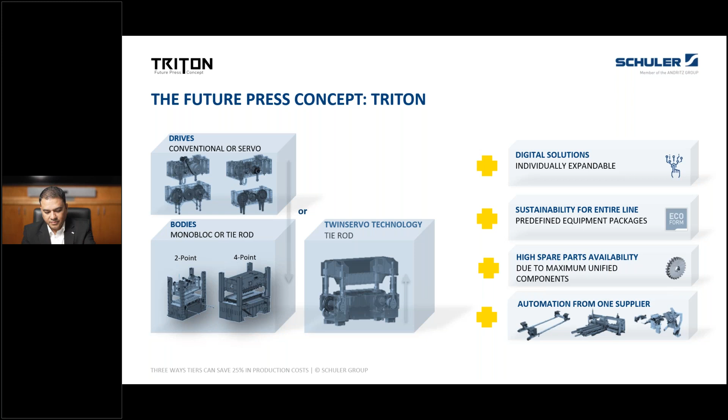So when I was talking about the modular design, we all know that modularity is a principle. When I talk about a principle, the immediate example that comes is a car. If I want to buy a car and I have got less money in my pocket, I can still go and buy the basic model and then upgrade it later on with whatever modular things are available, for example, a 7-inch screen display on my car.

So with TRITON, you get increased output because most of them are built to that extent, like servo presses, and more availability with putting on different automations as well as digitalization. We also have faster setup with offline simulation programs, enhanced flexibility for the dies and the process. Of course, you can do certain things offline and then bring it when the press is ready for production.

Reduce training time for new workers. Most of our softwares or the programs which come with the TRITON presses are intuitive. It gives you enhanced things and they are graphic driven, plus the videos. It helps the customers, workers, pretty fast to come onto a level which is required by the company.

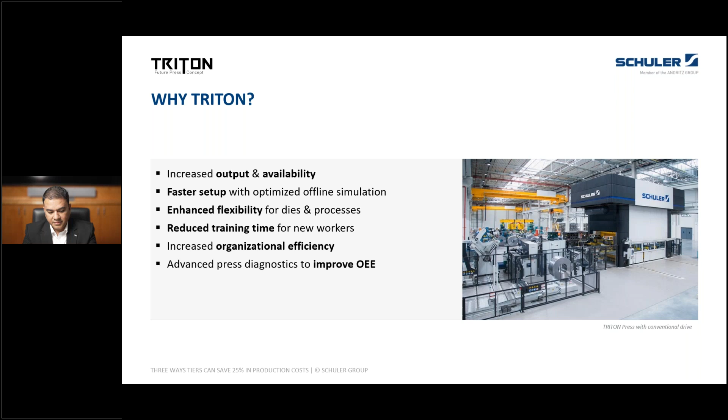So, 3 ways a company can save up to 25% in production costs. We have curated 3 main topics for you all: technology, digitalization, and operations. When I talk about putting it at 100%, let's take a theoretical example. So technology contributes close to around 70% of the entire cost. Digitalization, close to around 20%, and operations being at around 10%.

Now, most of the companies have a good amount of skilled labor, so they can do away with simulation softwares if they're already doing it. So you can do away with those 10%.

But when I'm talking about technology, it has subdivisions to it, like rigidity of the press, performance of the press, how much energy saving I'm doing on each part, each component, family of parts, higher efficient motors that I'm using, efficiency of these motors, how much I am minimizing the higher off-center loads, transfer with anti-vibrational damping, which is Schuler technology again, which we will see in one of the videos as well.

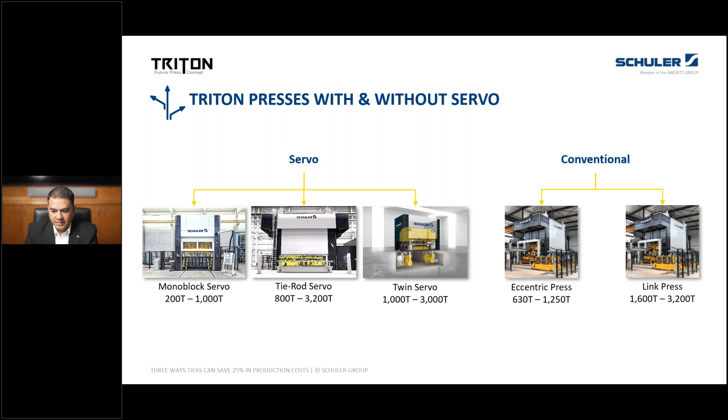Servo presses are quite efficient, directly attached to the main shaft or drive shaft without reduction gears. You get high optimum torque even at slow speeds. You have water cooling, which earlier was air cooling, or in flywheel presses it was much more difficult. You only had sinusoidal waves, so from TDC to BDC it would be constant. But with servo presses, you can control how your slide behaves from TDC to BDC.

I joke around with a couple of people when I meet my customers. In humans, you've got two main dates, the birth date and the death date, and everybody around you is interested in what happens between these two dates. So my joke for the presses is everybody is interested in what is happening between the TDC and the BDC. We all are interested in this zone only.

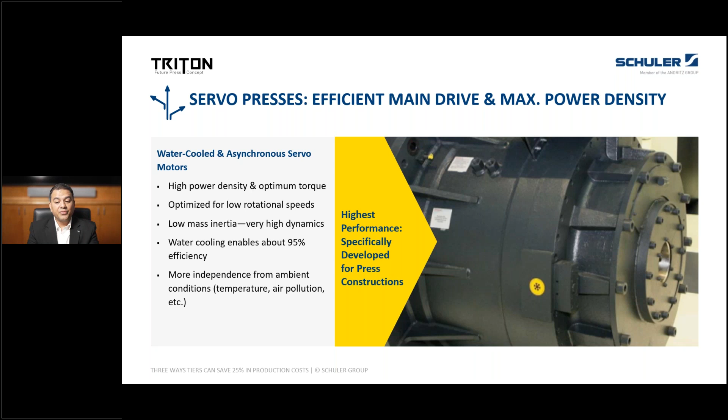So that's why with servo presses we are much more interested, because we get more time for our transfer, for our lubrication if we are performing anything, part transfer if there is a rollover in between. And we can take much more into consideration if we are doing it with a servo press.

Here is an example of the same. On the left-hand side, you've got a TML, which is a link-driven 4-point 1100 ton press with a table size of 5 by 2.2 meters. When I talk about tonnage, I'm referring to metrics, not US tons. The total consumption for this press was around 11.04 kilowatt hours. Let's consider this as 100% of the energy utilized. On the right-hand side, the center graph shows total consumption using the same 4-point servo-driven press was 8.18, which is close to around 26% less energy.

The component was similar for both these presses, and we were running at around 14 parts per minute for the continuous run. We measured it with a 4-quadrant counter EVU measuring device, and the measuring time was close to around 15 minutes. So you can see that when utilizing a servo press, the energy savings are approximately 26% for consumption.

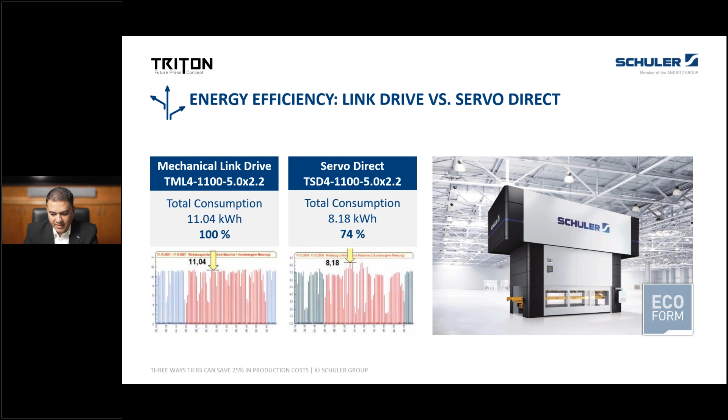Energy efficiency. Sustainability is much more important today than it was earlier. So Schuler is bearing down on all relevant parameters in plant process technology, whether it's a matter of saving electrical energy, cooling water, air, space requirement, machine configuration, process optimization, and many more.

TRITON presses use energy efficient components, like I mentioned earlier. Most of these shown on the slide are standard, except the noise absorbing cabin or sound enclosure. Most common on the European side for less energy consumption are illumination with LEDs, and main drive motors using a torque motor with servo drive that can be up to around 96% efficiency. Hydraulics, powertrain, of course, with optimized mass inertia, fewer moving mass with the gears, and less friction in the crown.

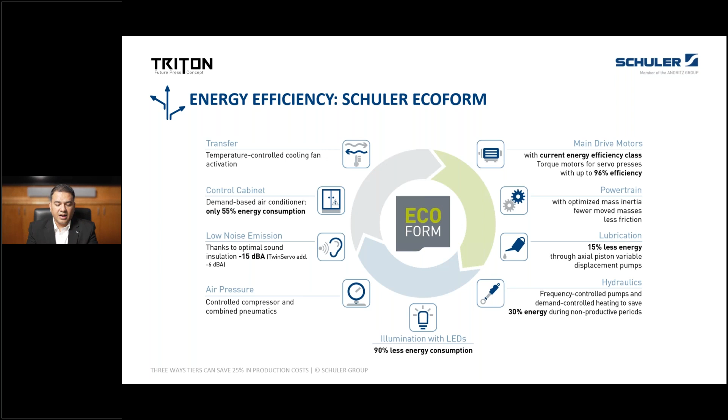One of the packages we talk about is energy monitoring. I have been emphasizing energy because this is what most companies in the Asian and European markets are much more concerned about. Either way, it is also coming to the US as well. With a package like EcoForm Plus from Schuler, you can monitor energy consumption per part, and total energy consumption of the complete line. This gives you the capability of immediately seeing how much energy consumption is done by your machine.

You can also quickly and easily identify deviations because you've got historical data on this. The energy monitoring system creates the highest level of energy transparency. So the production manager might come up with questions like: what stroke rate is most efficient? How much energy is consumed for one part, or what part is causing a problem for the energy? How much energy was consumed during each shift, and so on.

We also have options like the energy efficiency package for process monitoring. For the envelope curve, you can have two limit curves, the upper limit and the lower limit, and you can define how your target value looks. Whenever your tolerance band is crossed, the press shuts down when the set parameters are exceeded.

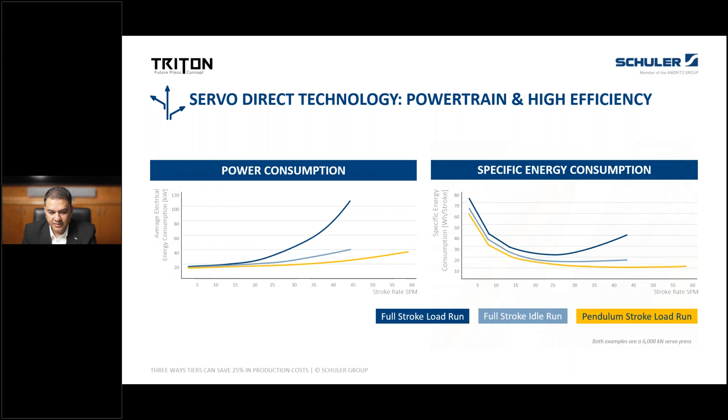Low mass inertia, high force compensation. Most or all of our presses use double helical gears, also called herringbone gears, which transmit power between parallel shafts.

Herringbone gears were developed to overcome the disadvantage of the high end thrust present with single helical gears. Since it has the opposite helix angle and the gear cuts accordingly, with a very narrow gap in between, it ensures axial thrust loads are negated.

These are self-centering gears, and that's the reason you don't have any external transverse forces. These are cast wheels and in one piece. That is where they give better dampening properties, higher stiffness of the drivetrain, and thus also lead to direct power transmission and long service life.

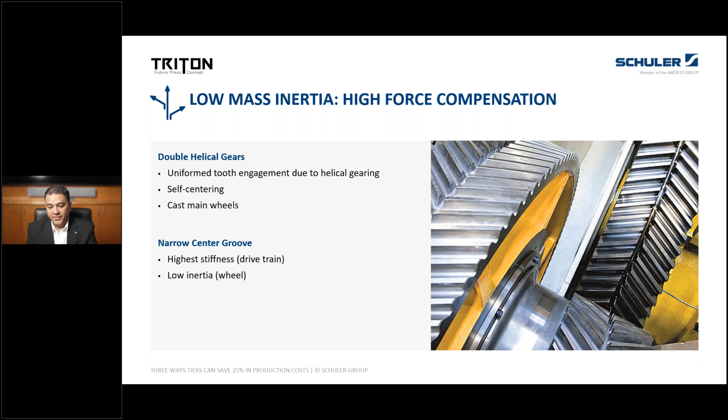Under the technology, one more point most customers are worried about is the high off-center load capacity. With Schuler presses, we have higher off-center load, and permissible forces below the curve are completely usable - meaning 100% of the press capacity.

The extremely high tilting resistance combined with the reduction in deflection leads to improved quality of the parts. It reduces stresses on the dies, so you don't have much die work or repair, and die life is a bit more than average dies used on conventional presses.

For example, the pressure points on the twin servo, as mentioned earlier, are on the outer side. So you get much more off-center load capacity, minimizing the off-center load issue on a TST press.

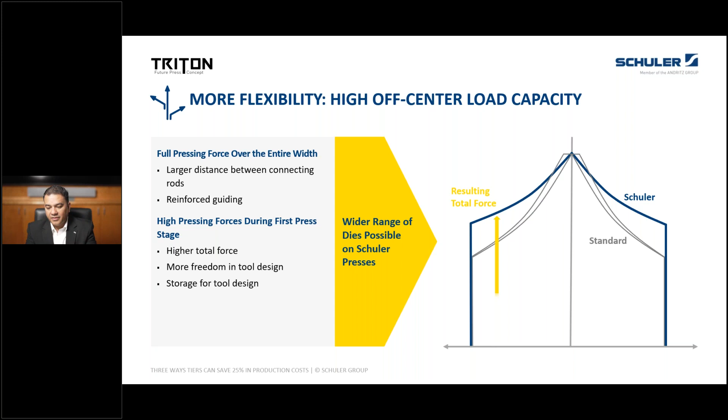Most presses generally have around 67% of the total area as the power on a specific area - like 2/3 of the length multiplied by the width. In Schuler presses, it is 2/3 of the length and 2/3 of the width, which is close to roughly 40 to 45% of the total area. This means you have more power possible on the same area when operating with a Schuler press.

Pressure points: Schuler manufactures presses with 2-point as well as 4-point pressure point configurations. Depending on the force transmitting element, we have different configurations for the pressure points. When an off-center load is exerted by the die on the slide...

We all know a multi-point press is better able to adapt or counter the resulting tilting movement, so you've got large adjustment ranges for maximum flexibility. Our presses have around 2 inches of overload, close to 50 millimeters of overload travel, to protect the press as well as the dies.

It detects loads higher than the nominal and shuts down the press movement. There is an oil chamber which releases during the process, giving time for the slide to brake.

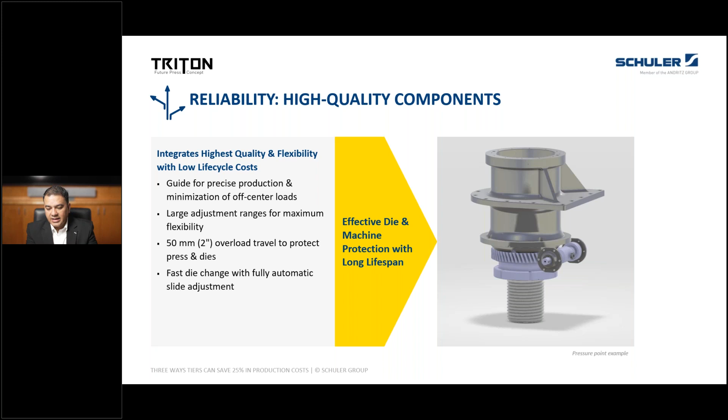Slide guiding: the better the slide guiding, the lesser tilting you have on the press. 2-point presses use 8-sided roller guides, which are backlash free and pre-tensioned. Roller guides are similar to ball guides, but roller guides have a line contact with the slide and greater load capacity compared to the equivalent size of a ball version, providing a greater area of contact.

On 4-point presses, we have guides suitable for large cross forces. The slide guiding is guided along the entire stroke of the guides.

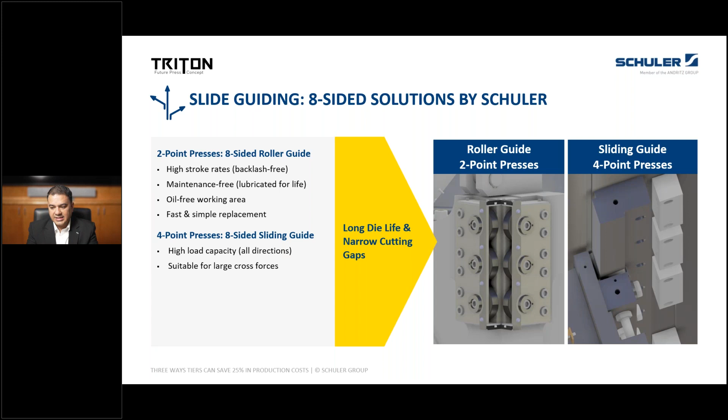Schuler transfer system with active vibration dampening, or AVD. This is also a modular system that Schuler has developed and has been used by so many customers worldwide. It's an asynchronous movement, profiles, selectable clamping boxes, which you can have positioned in the entry or the exit, with freely programmable axes with perfectly synchronized movements, providing the best adaptability for all the components.

4-point and 6-point support offer maximum rigidity of the rail and safe transport of the components, even if operating at maximum speeds. So if you're overlapping most of the automation with the transfer system, you can get a high output of close to around 10 to 15%, also at higher velocities and acceleration with less vibration.

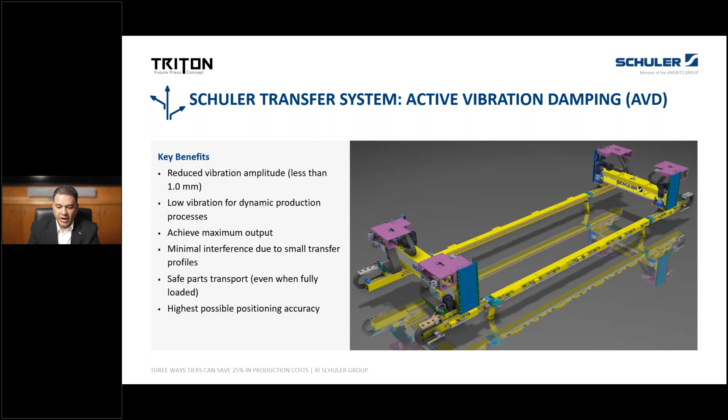I've got a beautiful video for you all over here, which explains exactly how this works. So this particular press, for example, is operating at around 34 parts per minute.

And you can see the vibration which is happening when we have the AVD off. As soon as you switch it on, within a couple of seconds, you can see the movement is completely gone and stabilized. So the x-axis is close to around 800 millimeters, the y is 200, and z, the lift, is close to around 50.

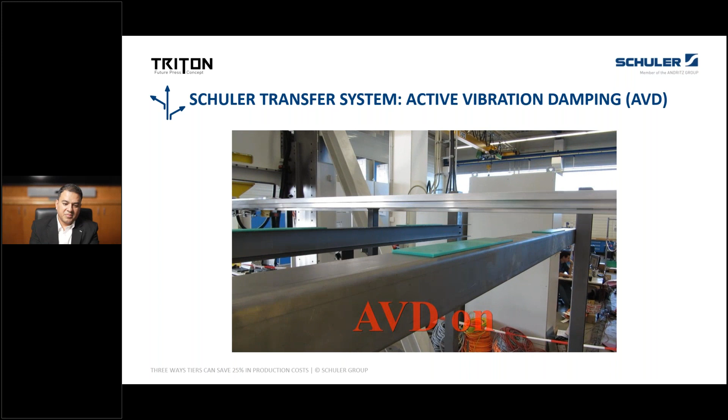Plus, the electronic overload protection of the transfer system guarantees a safe shutdown and that the axis does not have to be recalibrated again.

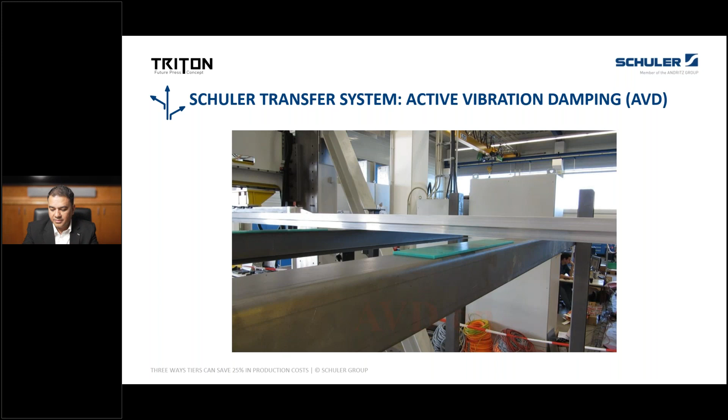Like I mentioned earlier, Schuler is always present as a turnkey solution provider, from feeding to removing. So with Schuler Complete Line, you have one contact or the main project manager. Output optimized, with the same visualization, the HMIs almost identical for all the presses throughout. So it is so intuitive that the workers as well as the on-site managers have very easy operability of the HMIs and visualization.

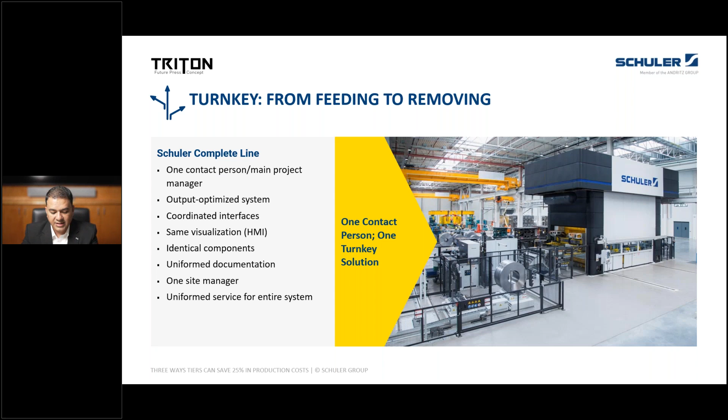Going on to the next topic is digitalization. So we're talking about overall equipment effectiveness. This is a production monitoring which we have on most of our presses. We all know that overall equipment effectiveness is like a standard for measuring manufacturing practices. Now, in theory, if we multiply all the factors together, an OEE of 100% means you're manufacturing only good parts as fast as possible, with no stop time.

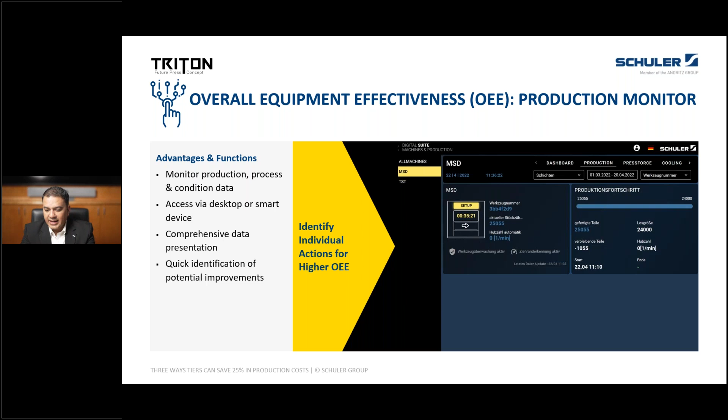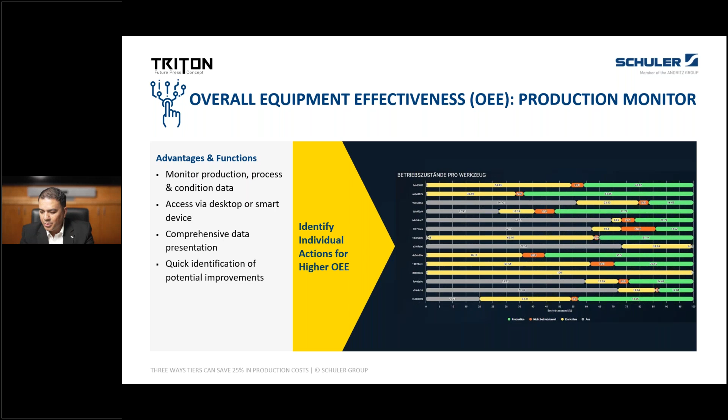Another screenshot talks about how much time the machine was under production for each and every die, how much time it was under non-performance, and how much time it was under setup mode as well.

Overall equipment effectiveness can also be done with one of our camera-based monitoring systems, which is VDP, a visual die protection. The beauty of this product is it can also be implemented or programmed onto a non-Schuler press, so it is not Schuler related. It's a separate digital item, a camera-based monitoring system, that can protect against tool damages, machine downtime, and can save costs up to around 10%.

With this camera-based system, you can detect foreign objects which are present. Of course, there is maintenance happening on the dies—sometimes the maintenance guys can leave spanners, or there is a missing part. There is process inspection, in-process checks, monitoring of critical die functions, and so on.

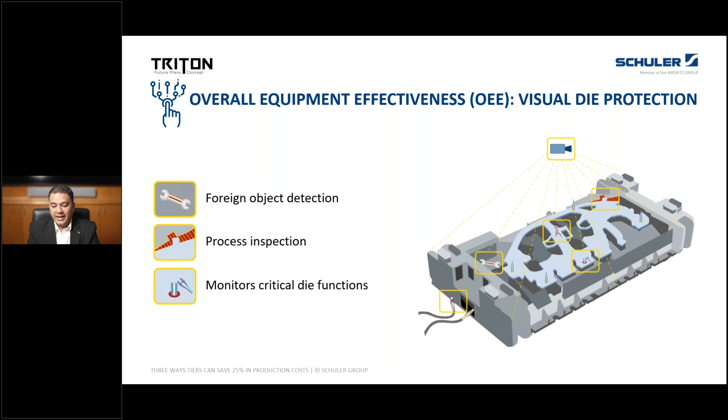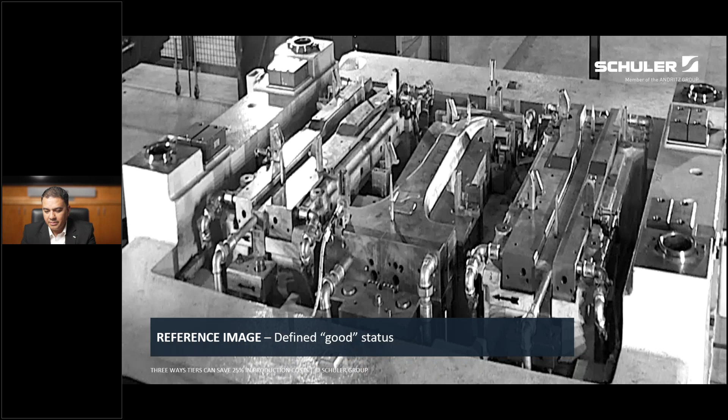So the first time when you put the VDP into use and you're about to go for production, you make a reference image. This is called the good status of the die. I will be going forward and backwards between these two slides multiple times because I want to show you how the anomalies work.

On the left-hand side top, the part was not taken out, either by the operator or a robot. You can see on the part on the left-hand side there is a glove left by the maintenance guy on the die, there is a spanner, and also a pin which fell loose on the right-hand side. This is the actual triggered status. Every time there is an anomaly, it sends signals to your press and the press shuts down or stops immediately.

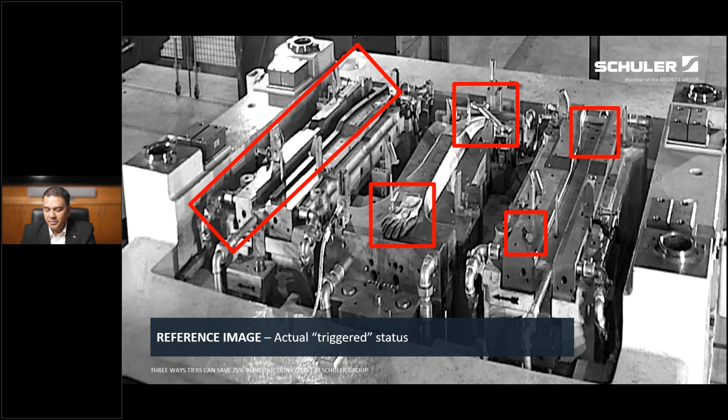I've got a video for this, which I'm going to play for you.

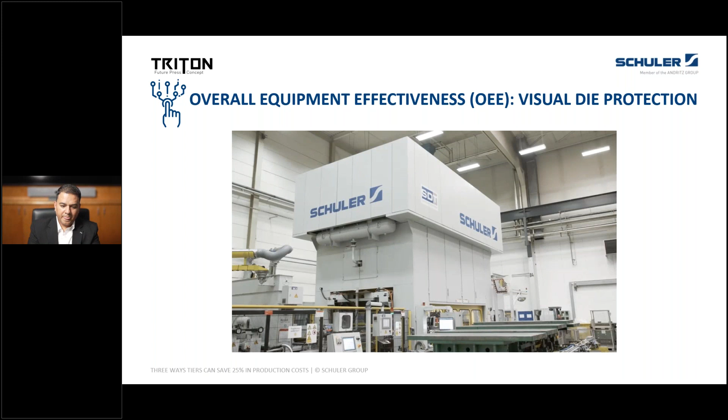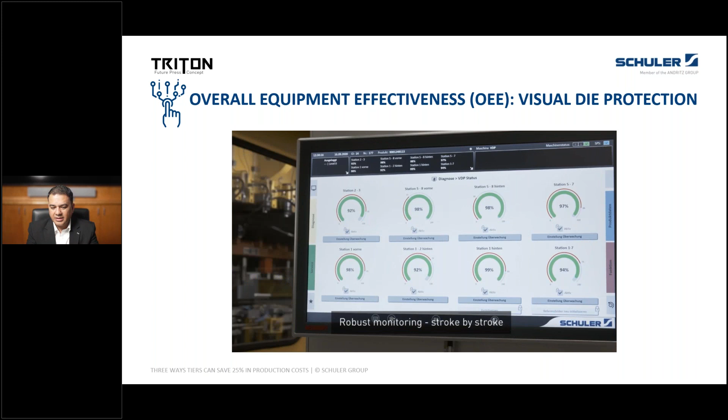With VDP, you can put up to 8 monitoring functions on one particular die. You can select the camera, the time, the image area, and specify the limit value for that particular critical deviation that you want. The cameras then start monitoring the press when it is in function.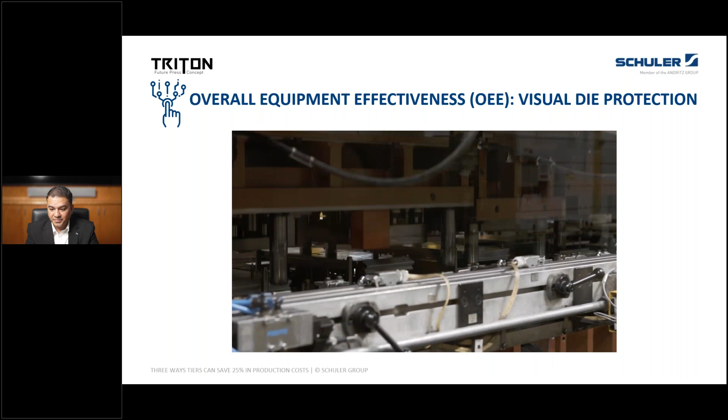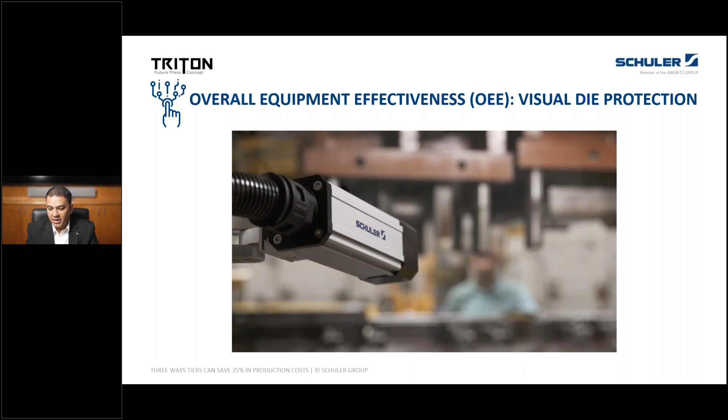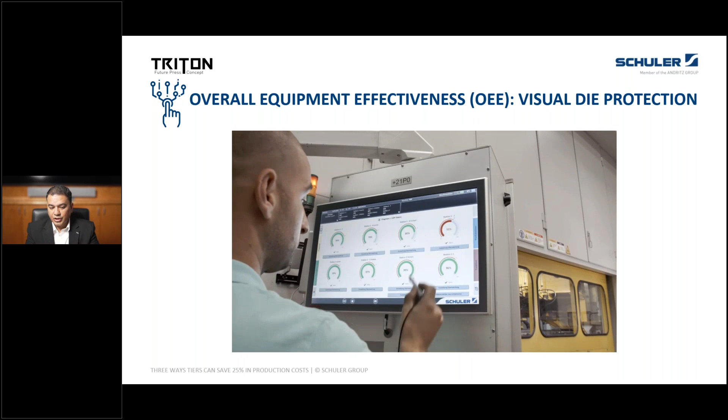Whenever an anomaly or something happens which you have reported, it will immediately tell you what exactly the anomaly was. You can go in, correct it, and restart the press again. Live images are compared to the reference images at defined times and checked for the critical deviations that you have.

So let's move on to the next topic, that is operations. Under operations, Schuler has got a couple of online as well as offline programming options, like the Optimizer Pro.

The Optimizer Pro is a basic curve generator. You can program everything offline and then push it onto the Smart Assist, which helps record die-specific parameters for the press, the transfer setup, plus you can do the optimization.

With the Optimizer Pro, the transfer angles can be calculated automatically. Movement profiles of the slide can be designed freely in regard to the stroke height, form, as well as speeds.

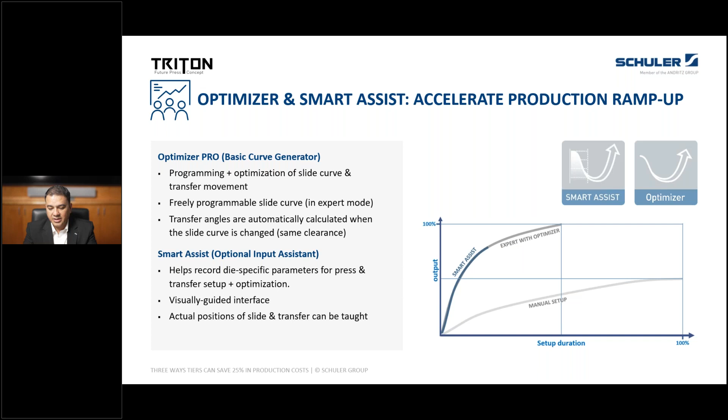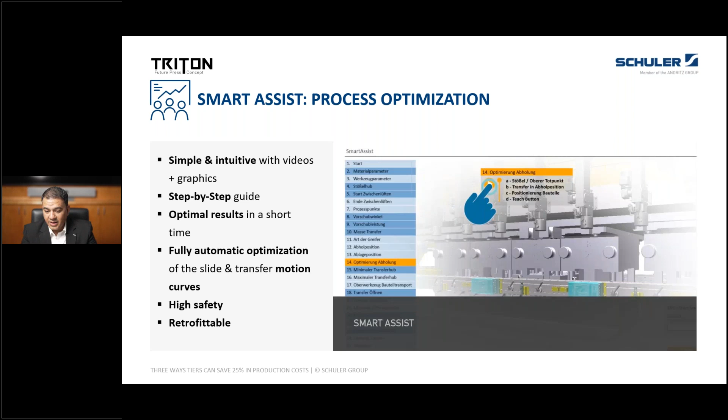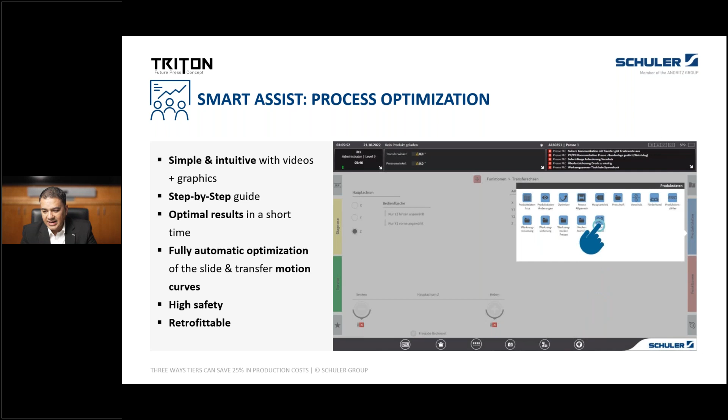Let me take you through one more video, which is simple and intuitive with the graphics. Like I said, for your new level workers as well, this is absolutely simple to go through. Under Smart Assist, you go to the production data, you select the Smart Assist, and you get a bunch of options.

So you start clicking the one which you want to optimize for your particular transfer, and it will give you step-by-step information as to exactly what you need to perform.

So you open the slide, ensure that the position of the slide is at TDC, position the transfer at the pickup position, lift the parts by jogging it in the Z axis until the target feed movement is achieved, and register that particular target and put it into the teach function.

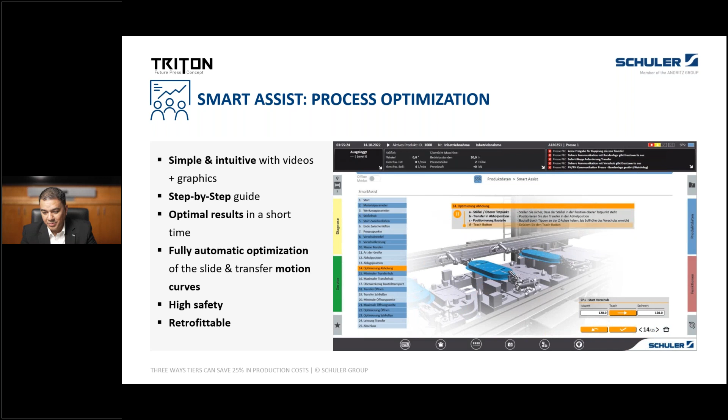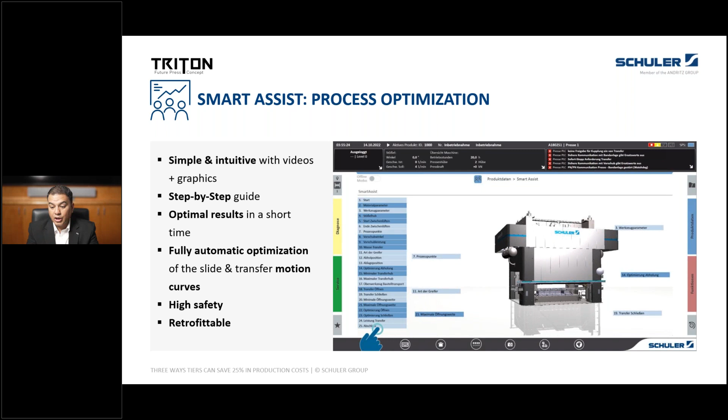And then once it is absolutely clear of the tolerances, it takes care of it. This is also beneficial for easy creation of new die programs when they come in, or new part programs that you're developing for the OEMs or tier 0.5.

Data is recorded directly, with the teach-in functions and the press control panel or a smart device. It is fully automatic because you're taking all the data from the Optimizer Pro.

This particular Smart Assist is also retrofittable. But it all depends, because if you're having presses which are too old, most of them probably do not have, for example, an Ethernet connection. So we can figure that out, but it needs a lot of diving into the situation you're currently in.

DigiSim Unlimited is an offline virtual production ramp-up software. This is an offline simulation. It can be for a progressive die as well as for the transfer presses.

This is an add-on to one of our other simulation programs, which we call Transfer Basic. It also has beautiful features like programming of additional movements if you have lifters, rotating grippers, kinematics, which are completely different from what you want to do from one tool to another. You can do automatic collision control as well.

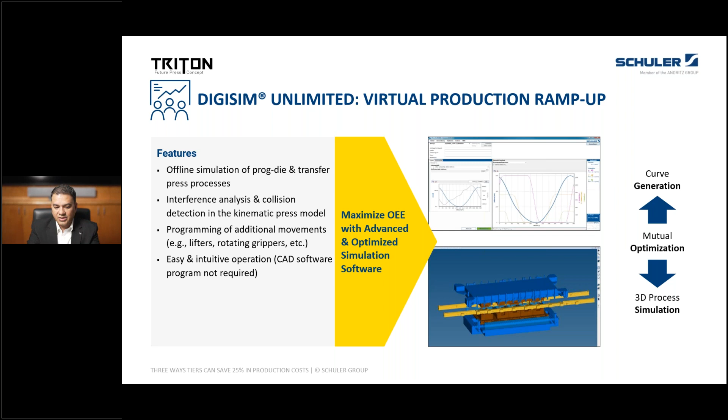DigiSim has got generation of all necessary processes. It has reliable output calculation for better pricing of the part. Die data can be prepared, optimized, and managed offline. So if you have a new die or a new part set which you have to prove out, you can do it offline to the absolute last level and then push it onto the press.

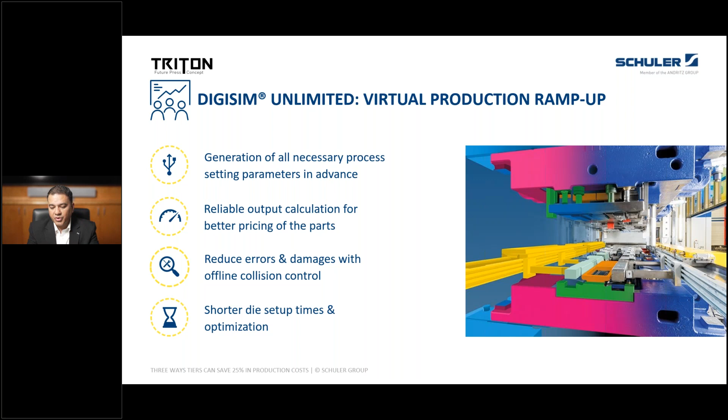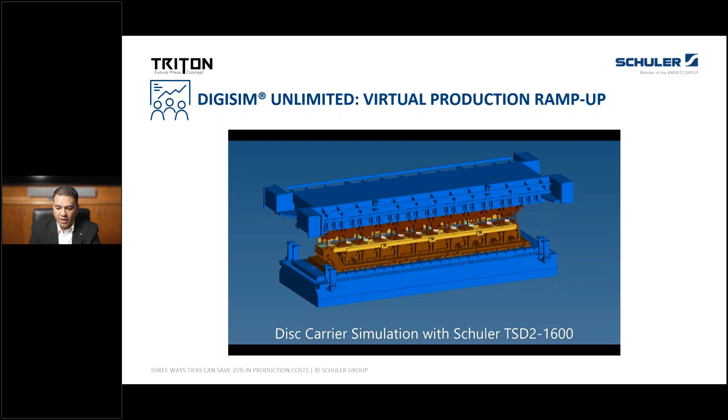To explain this, I've got a video. This is a simulation done on our servo press 1600 ton with a medium duty transfer system.

You can see you can operate the press at different stroke levels and see how exactly you can ramp up the production, at what speeds you're operating, whether it's 160 millimeters before BDC or after, and you can go up to 240 millimeters per second. The transfer movement is optimized with overlapping motion of different axes.

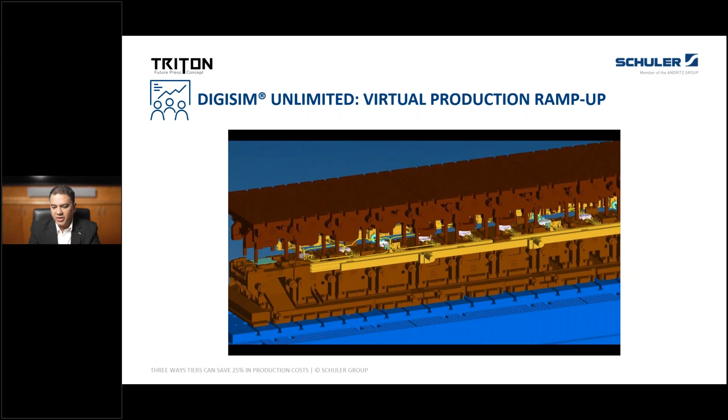And here you can see the same speed forming as a conventional press. If you're operating, that would do around 9 parts per minute.

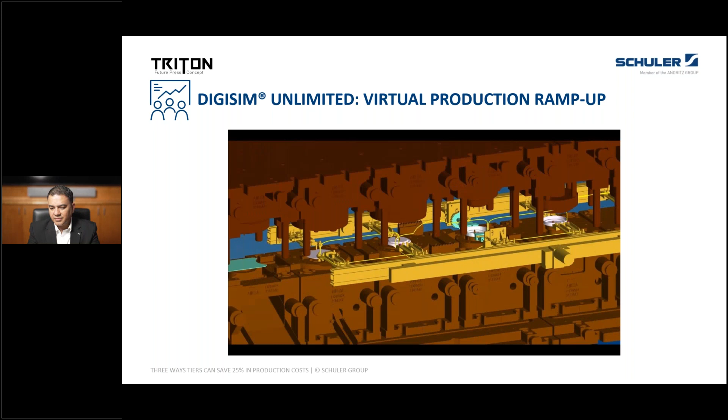In that, we come to the end of the presentation. I hope you all were okay with whatever was shared, and thank you for being patient listening to our presentation.

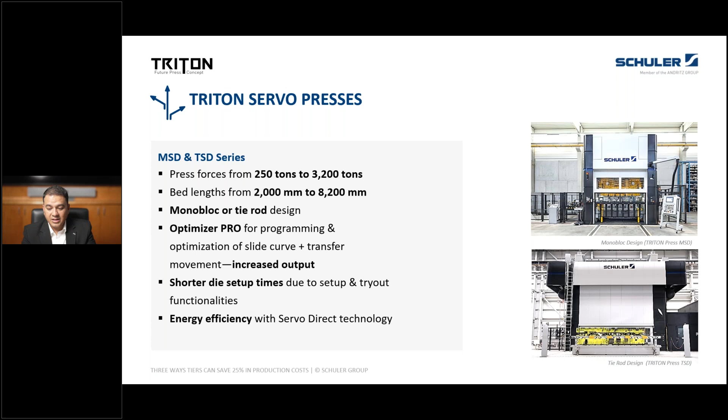And just to recap quickly, we have got, like I already mentioned, these are the series that you have, like the monoblock design and the tie rod design. We have press forces from 250 to 3,200 metric tons. Comes in a monoblock or a tie rod design, with Optimizer Pro, shorter die setup times.

TSD version, worldwide it's unique. Why? Because it's got the servo motors in the pit. That's how you get around 30% less spring back on most of the components that you're manufacturing. It has got significantly higher off-center loads with the same press force.

And of course, with the flywheel or the conventional driven presses, we've got eccentric as well as link drives. So eccentric drives up to say 1250 tons, and thereon we are into the 1600 ton up to 3200, we are into link driven presses. And if we have any questions, I can answer them.

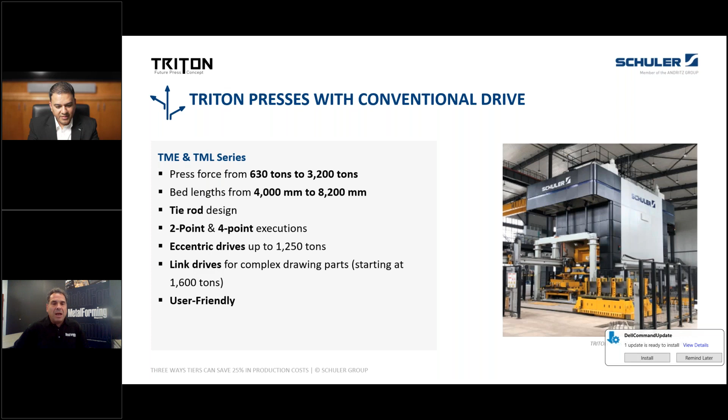I do have a question for you. I found that EcoForm functionality pretty interesting and certainly useful, I suppose, for ESG reporting, which is becoming more and more important as time goes on. And if I heard you right, you can capture energy consumption by job number or part and report that back to the customer, I suppose, right?

Yes. Okay, so are you seeing that being done currently, or you can see it coming down the road with some of your customers? Yeah, whatever percentages I have been stating during my presentation, it was all a brainstorming session internally which we did at Schuler. Also, we got the analysis and everything done with the customers, those who are already using our servo technology or the TRITON series presses.

Fantastic, great, okay. So what more can you share with us then about the trends that you're seeing in terms of press size by force or bed size? And if you want to comment on those trends and maybe the challenges that they present to manufacturers.